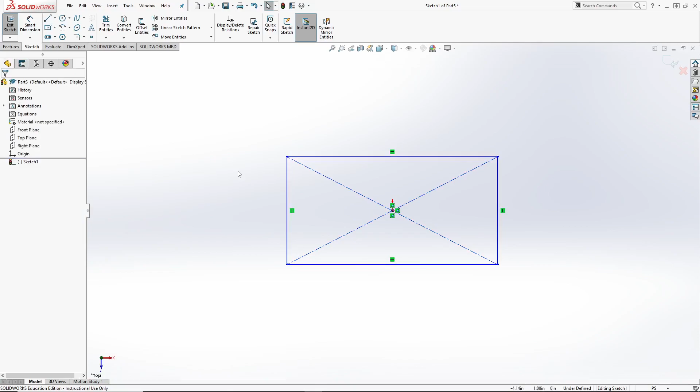So I'm going to start with a sketch on the top plane, and I'm going to use the center rectangle tool and just make a rectangle using the origin as my first click, and then just click randomly out here. I'm going to set some dimensions up here. This needs to be 40 and the top needs to be 70.

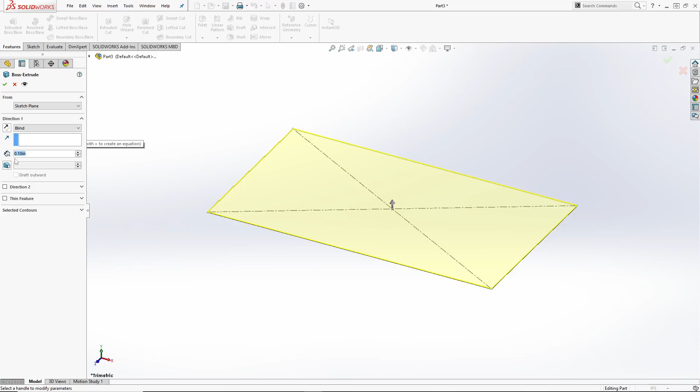Okay, and then I'm going to fillet these two corners. Well, I guess I could actually fillet it later. So let's exit sketch and just go on ahead and extrude this up. Control 7 will get you into isometric mode right here, and I'm going to extrude this up 20. Okay, and that's going to be my little base there.

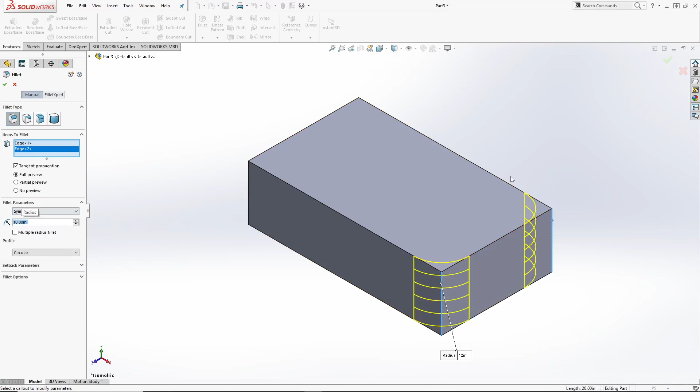I'm going to use the Features Fillet tool to fillet these corners. They have a radius of 10, I believe. So I'm going to go to fillet here, set my radius on the left to 10. I should be able to just click these edges. And if you click full preview over here, like I think by default it's on no preview, so it won't show up as you're clicking them. But if you click on full preview, it'll give you those little previews right there, and you can hit the check mark to get that.

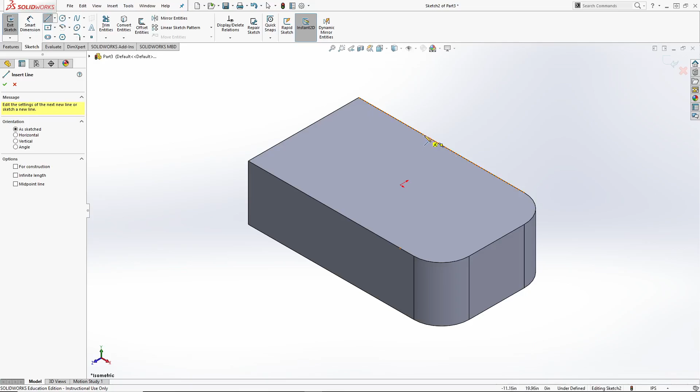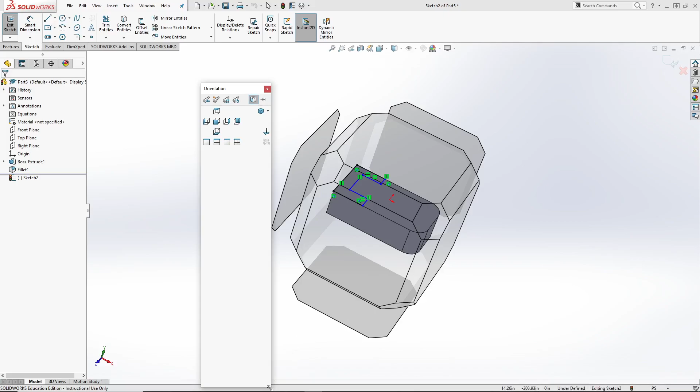Okay, and then from there, I'm going to draw a new sketch on this plane, and I'm just going to kind of draw. Again, I'm on Control 7. I like drawing on isometric most of the time if I can, rather than drawing on the flat face of the object. Not that it matters. You can always hit spacebar and then click the face you want to view the object from.

So I just kind of drew this. Make sure you close the polygon. I had some people in the past on the previous drawing not closing their polygons.

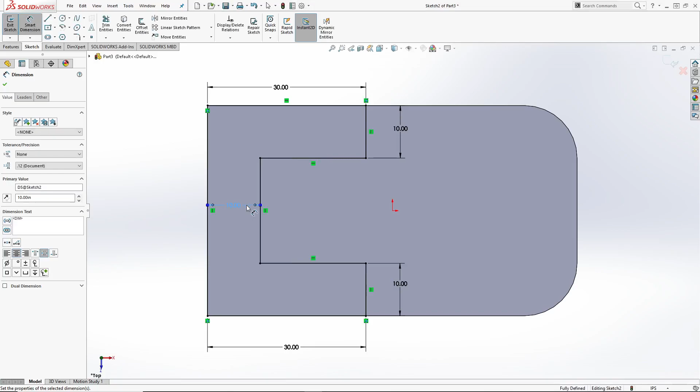Okay, and I need to add some smart dimensions to this. So this side here is supposed to be 30. It's probably the same on the other side as well. I'm going to assume that these line up. That's 30. And then I'm just looking for dimensions on the other side. Looks like these are 10, 10 and 10. And then this width here, because that line is still blue, needs to also be set to 10. Okay, and everything should turn black there.

I'm going to exit sketch, features, hit Control 7, and extrude that up a value of 20. Okay, now I've got that piece built.

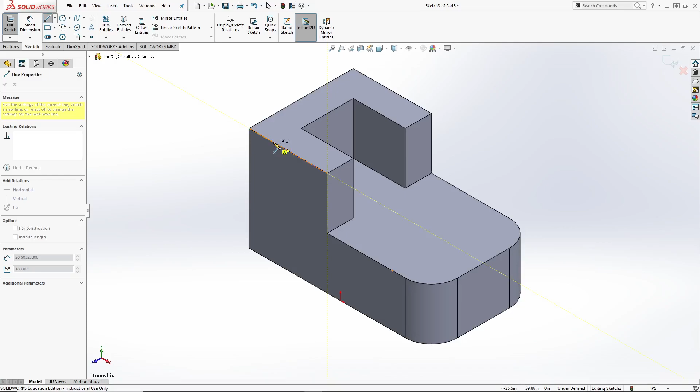And now I need to do an extrude cut of basically a triangle that goes and cuts this little front piece off. So I'm going to go to the sketch tool, sketch on this plane, and I need to create a triangle. Starts here, goes over 20. Let's see, if this was 30, it needs to go past that midpoint. So I'll just go there, and then there, and then there. What's important is that this dimension here is exactly 20. Everything else just connects to an end point and an end point. So make sure you get that 20 on there.

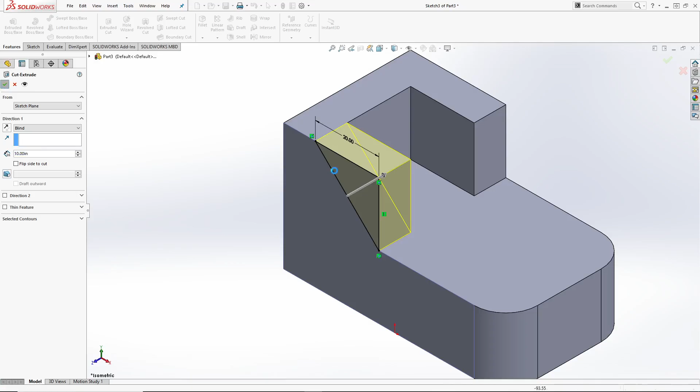Features, extrude cut, and I'm just going to cut that back. I'll cut it back 10. You could cut it back bigger if you wanted to. It doesn't matter, but cut it back 10, and that is that.

The last thing is sketching a circle here somewhere. So I'm just going to hover over this midpoint. That way I know it's at least in the center that direction. Okay, there's my circle. The size of the circle needs to be diameter 20.

And the location of the circle needs to be 50 from this edge here. So I'm going to click that edge and then here and set that to 50. I don't know why it's still blue. Oh, I guess there's nothing locking it up and down this direction. When I first created the circle, I lined it up with this, but if you want to get that black so that it's fully defined, you could pull a dimension from there. It should already say 20, but that'll make it fully defined.

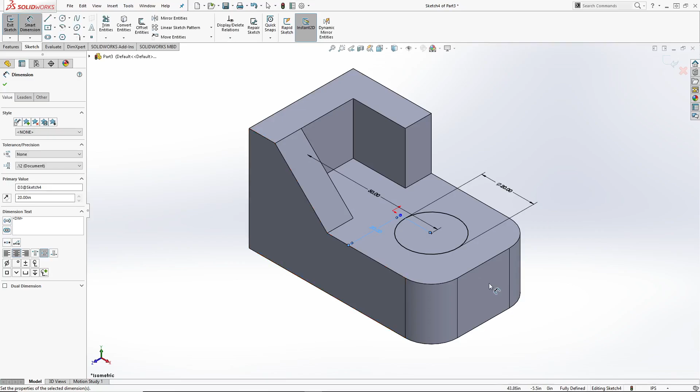Exit sketch, features, extrude cut, and I'm just going to cut that through all and hit the check mark. And that's the drawing.